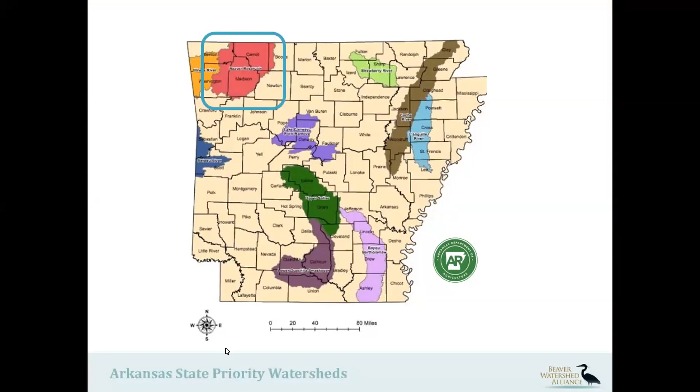The Beaver Lake watershed is a state priority watershed with tributaries that are listed on the 303D list that do not meet their designated use. There are currently 5 stream reaches that are listed as impaired, and part of that impairment is caused by sediment.

Sediment is the number 1 source of pollution in this watershed. Stream bank erosion is currently the highest contributor to sediment. Urban runoff and dirt roads also contribute. Low density development and loss of pasture land and forests is expected to have a greater contribution to sediment loads as we grow in this region, particularly in the western portions of the watershed.

That's why it's really important for us to focus on reducing rain runoff. Anytime we can slow down the rain, soak it in on site, decentralize it, or use nature and design to build and accommodate the stormwater, we can prevent or reduce these environmental impacts downstream.

A lot of communities are seeing the value of green infrastructure and LID as a way to solve water problems, especially ways to handle these more intense rainfalls we're having. We used to get 3 inches over a 24-hour period. Now we're getting 3 inches in an hour. So we're seeing extreme intensities of rainfall here in the Northwest Arkansas region that we've heard all over the United States are facing similar challenges.

So how do we deal with that water? Where is it going? How can we keep it on site? With all this, green infrastructure and low impact development can help do that.

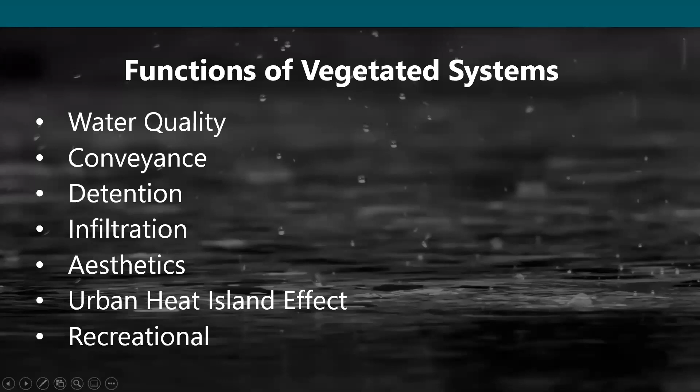And so whenever we work with either engineers or owners, and they're looking at implementing this type of feature, the first thing we want to talk about is maintenance. And when it comes to vegetated systems, plant selection is really crucial. Sometimes they'll want a lot of native plants, or they'll want a very extensive planting plan. And if the owner's not prepared for maintenance, then that can be a burden on them.

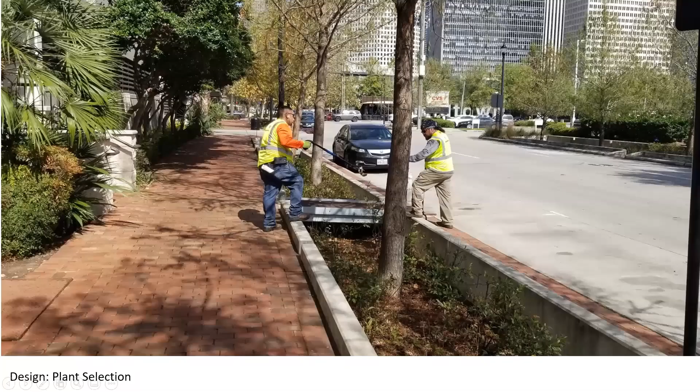So we have another question. Is a bioswale just a ditch, not an engineered infiltration trench with select media? So I think a bioswale can be with your engineered soil, or it can be without it, just depending on how you do your design. So I think it kind of goes both ways.

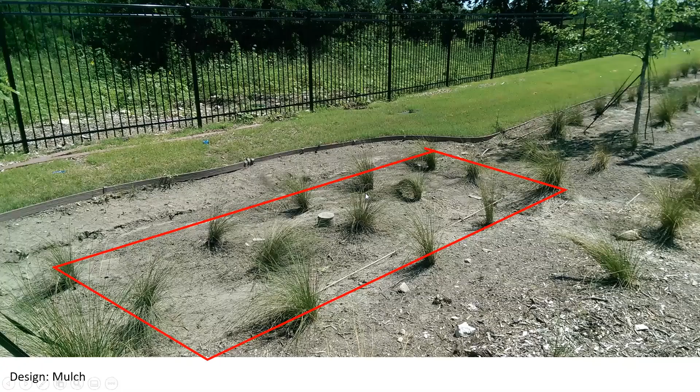Now when it comes to bioretention rain gardens, a lot of times you'll see a mulch layer on top. I like using mulch when you are going to infiltrate water into engineered soil, say if you want to drain water into a subsurface drain. It's always good to have a mulch layer sitting on top of your engineered soil, because it's almost like a sacrificial layer. Here's a project where the actual footprint of the engineered soil is roughly what you see on this red mark that I called out. They had some issues with erosion, which carried a bunch of sediment and clogged the mulch. But what's really good is it didn't actually clog the engineered soil. Mulch is very cheap and easy to maintain, so what you can do is dig up all the mulch that's clogged with sediment, expose the engineered soil, and put back a new fresh layer.

We'll figure out later on that erosion is probably the number one killer of vegetative systems, when your slopes start to rill out and just carry loads of sediment in there.

So what is engineered soil? I would say engineered soil is a type of soil blend that meets certain water quality and infiltration specifications. Typically it will have a specified infiltration rate, and it will also provide some type of water quality benefit, generally removing total suspended solids, oil and grease. It's also a loosely defined term. If you blend up sand and compost together, technically that's engineered soil. So it's a pretty broad term, but when I refer to engineered soil, I'm referring to something with a specific criteria for drainage and water quality.

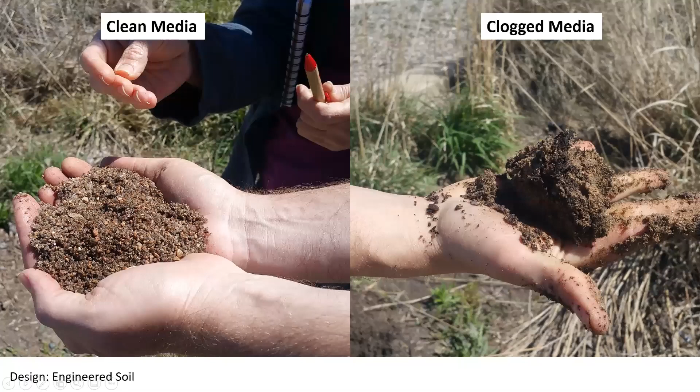This project, we'll talk about it more next week, but what's interesting about it is it actually went through Hurricane Harvey. So we put it through the ringer.

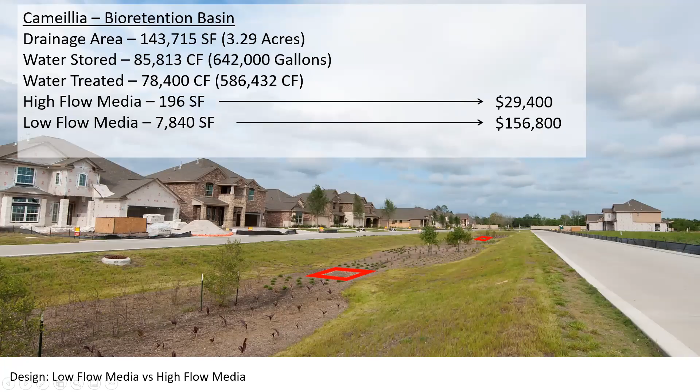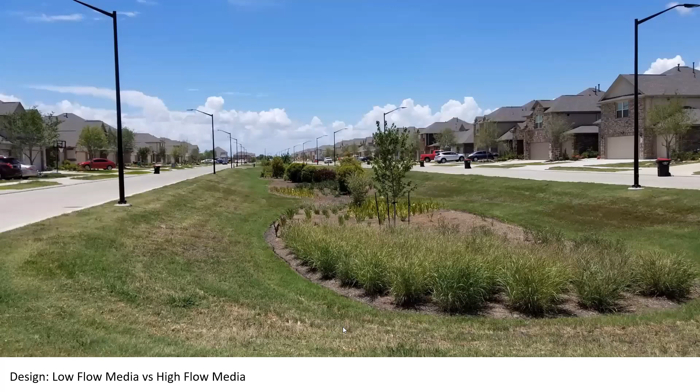All right, let's go. We've got some questions real quick.

Is your general expectation that the sacrificial layer will have to be periodically removed and replaced? Yes, I'll talk later on, but we usually remove and replace that mulch layer once a year, maybe twice a year.

What depth of ponding is allowed in this bioretention basin? Typically, you're going to see one foot of ponding. I know in certain municipalities, like Harris County and Houston, you can go up to 3 or 4 feet, but that's pretty much your limit, probably 3 feet.

What can local municipalities do when there are no compliance requirements or post-construction ordinance and the bioswale needs maintenance? Really, that's going to come down to the owner. If there's no one enforcing maintenance, the system will probably sediment in and work for a while, but depending on the design, it's only going to last so long without some type of maintenance.

Anytime you do these designs, it's good to put a maintenance contract built in so that after it's installed, the contractor has to maintain it for, say, the first 3 or 5 years, whatever it may be. But it's always good to also minimize your maintenance, so you can put in a design that's very low maintenance so the owner doesn't have to worry about it as much.

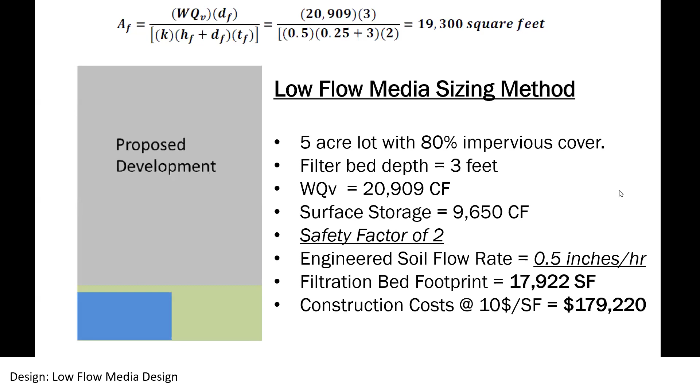So instead of using this model where we fill up our rain garden and then let it drain, what we like to do is use a more dynamic model. This is a TR55 model.

It's a very simple rainfall distribution model. It assumes that as your rain garden or bioretention basin experiences rain, the system is already infiltrating.

So that rain garden or bioretention basin can handle a certain amount of rain. At the point where the soils are flowing at their peak rate, that's when you actually get your surface storage, and the basin fills up with water.

If it's a really heavy event, you might get some bypass that goes into your overflow. But after the storm calms down, eventually that engineered soil will drain out the entire basin.

When you use this method, you get a more efficient design. Here's a good visual example of how that works.

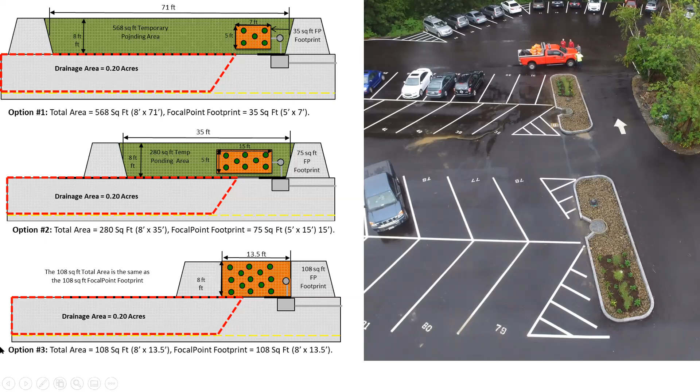If we take that same example and swap out a higher flow rate—in that first example it was half an inch an hour, but in this example we're upping it to 100 inches an hour—that dramatically reduces your footprint.

We went from 18,000 square feet down to 300 square feet. So we might still have a basin that's fairly large, but the component that actually does all the drainage needs to be much smaller, cutting down construction costs and maintenance.

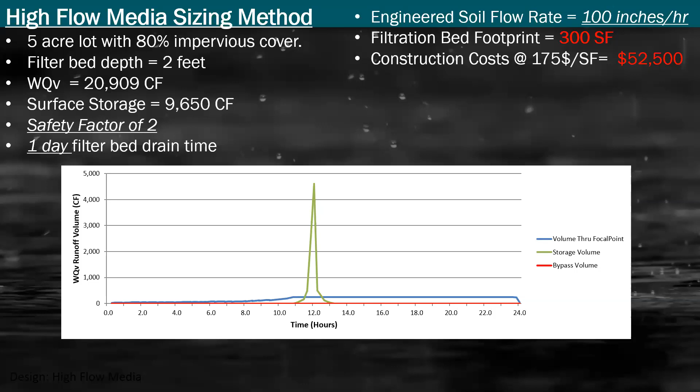You can also run these numbers through a TR55 spreadsheet just to ensure that all the water goes through your filtration bed and doesn't go into bypass mode.

Another good example of these types of systems is your subsurface drainage. A lot of times they'll use aggregate with a perforated pipe wrapped in filter fabric, but aggregate only has about 40% storage volume.

If you take a modular underdrain or some other type of arch chamber, you can actually increase that storage volume. Here's an example: instead of just using a perforated pipe, we use a tall modular underdrain.

Each of those boxes can contain 4 cubic feet, so we went from 40% void up to about 90% void.

There are about 10 or 12 of those boxes, so we have at least 40 to 50 cubic feet of storage just within the drainage structure, not including the voids of the backfill.

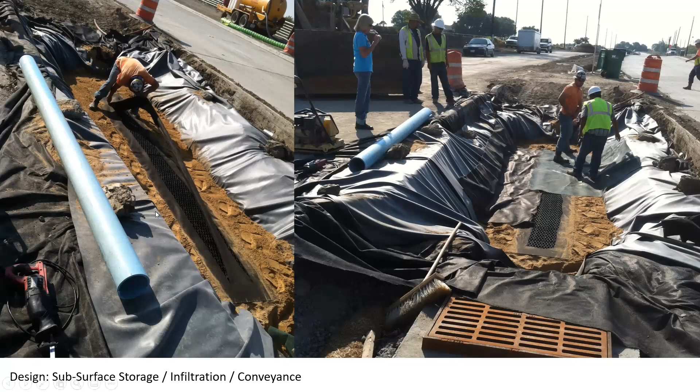Here's a better example of how you can expand that, say for a sloped bioretention basin—you can take that underdrain and expand it out, whether using modular boxes or arch chambers. Here's an example from a recent project we installed out in West Texas.

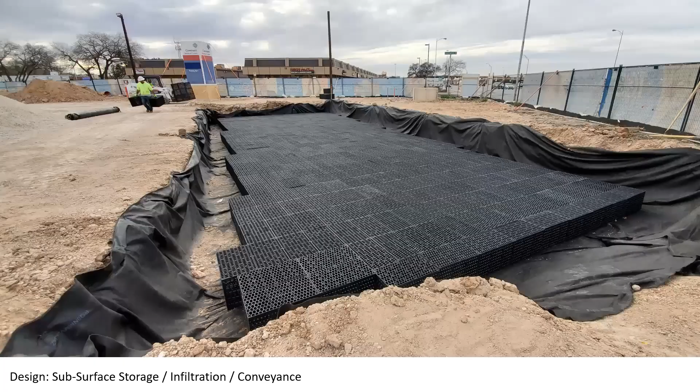So this system, I believe, is about 2,500 cubic feet. And then we ended up just installing a small 100 to 150 square foot bioretention system on top.

So you can see we built up these forms. We installed our bridging stone and our engineered soil. And they ended up backfilling the top of the tank and all the perimeter with rock.

So this is going to be a giant, basically an infiltration basin. And that's another advantage of using these systems, is that if you can't get surface storage, you can always store water below by expanding that under drain.

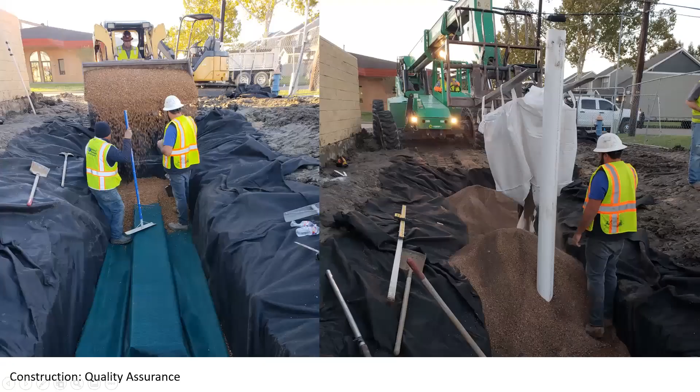And another thing that we like to do in these designs is use a lot of quality assurance. So when we install it, we like to put all of our engineered soil in super sacks.

We also, instead of wrapping our under drain in what we call a filter cloth or a non-woven, we use a microgrid. A microgrid essentially looks like a window screen. What it does is it keeps the aggregate from getting inside your under drain, but it also allows a higher flow rate, so you don't have to worry about clogging as much.

You can see when we dump that engineered soil in, typically we do about a cubic yard per sack. It's not too expensive to do this, because a lot of times we're only using maybe 10 or 15 bags, so we can fit all that on a truckload.

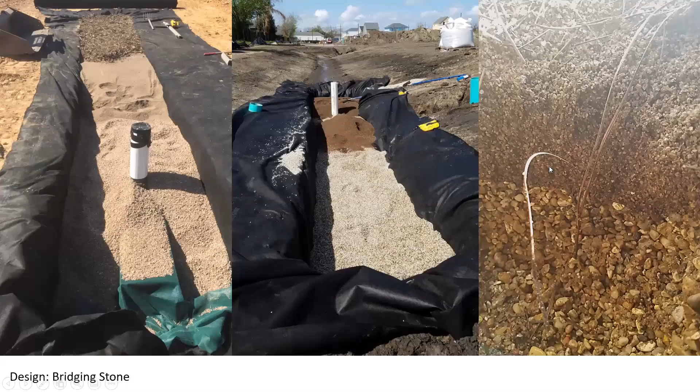If you don't know anything about bridging stone, I said that term before. Bridging stone, in our design, we use pea gravel, but all it really does is provide a layer. So basically what you do is install your under drain, backfill it with bridging stone, and then put your engineered soil on top.

So what happens is that engineered soil creates a bridge. Instead of having to separate the stone and the engineered soil with a filter cloth, you're just using a natural geotechnical process to do the work.

This is a pretty simple method you could do. You can have a geotech do that for you, and you can also follow it. There's a lot of local municipalities that end up using this.

And another thing we do is, after construction, we will wrap up the system. So after we install the engineered soil, you can see there's a lot of loose dirt, and we'll end up wrapping it up. A lot of times they'll end up getting a lot of sediment on top.

So when we come back to do the planting, we'll have to remove that filter cloth, put in our mulch, and end up doing the planting. And then you can always include this, we call it a SWPPP detail.

You can include this detail in your SWPPP plan so that the contractor ensures that they do it. If they have that detail in there, they'll more likely put it in their budget and install it correctly.

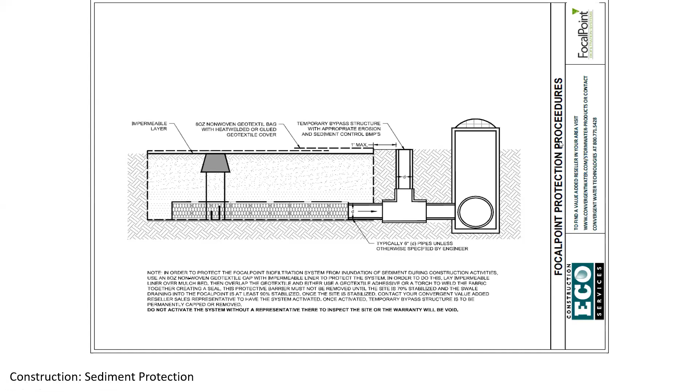And then you can always do an infiltration test. So one thing we do is when you specify engineered soil, if you have a flow rate of say 50 inches an hour, or 30, or whatever it may be, you can do a simple flow rate test. We have a little hydraulic conductivity tester we take out.

This just keeps the contractor honest, and it also makes sure that after you install it, it wasn't clogged from construction sediment or erosion. If the contractor can't pass it, then they have to go back and install it correctly or make repairs.

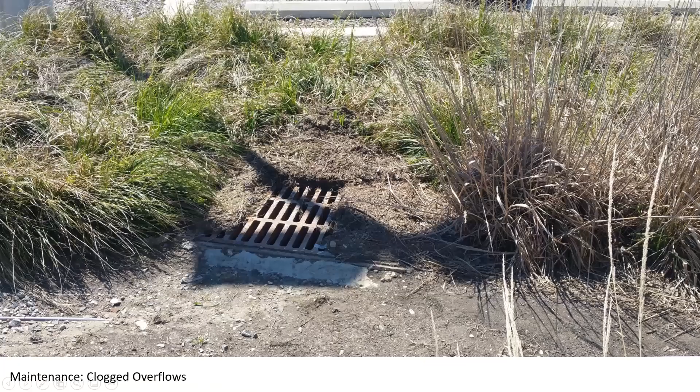Probably another common issue you see with these is the overflow structures will get clogged—you're going to have plant debris and matter in there. But what we like to do, you'll see later on, is use beehive overflows or an elevated overflow. Those flat grates will accumulate debris a lot quicker than, say, a beehive overflow.

And like I said earlier, erosion is the number one killer of these systems. Whenever you get these rills develop in the slopes, it washes all kinds of sediment into your system, and it can really reduce the performance. So that's something to watch out for.

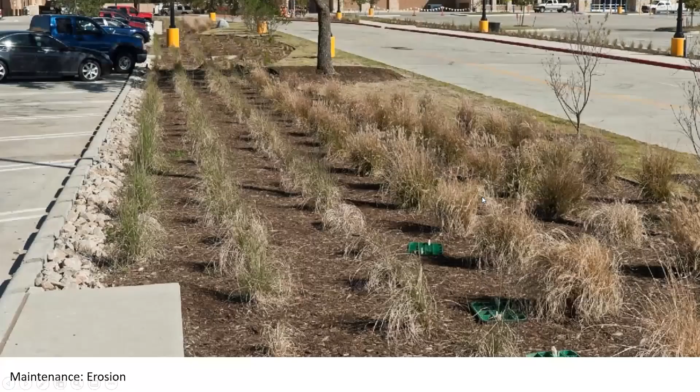You'll see this usually early on when they're trying to establish vegetation. And here's a good example—this is a project in North Texas where right after its installation, this looks perfect, right?

You can't get any better than this. You got your curb cuts on the left, you got some rock there to help dissipate the flow, and then the plants there to capture all the runoff.

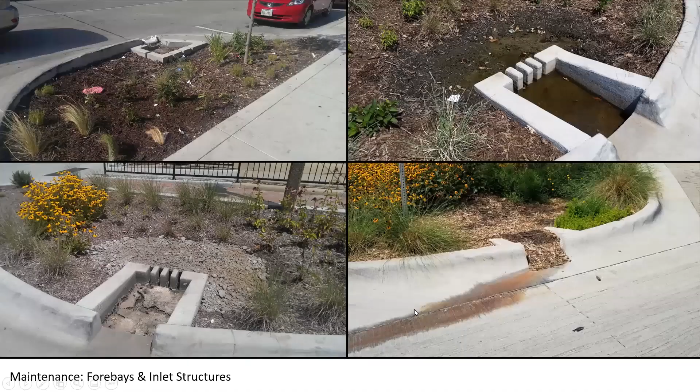You can also do forebays, structures like that. I'm not a big fan of just these concrete forebays, especially the open ones, because if you don't have a lot of free drainage, if your landscape isn't below where the water comes out of these inverts or structures, you'll end up getting ponding water and a lot of muck and debris.

You can also just do a rock forebay. But if you don't have some type of structure, especially in a parking lot that isn't going to get a lot of sediment, it's not that big of a deal. But an area like this, with a lot of people walking around and a lot of cars, you can see what happens when the sediment ends up dropping out of the water. Whenever it storms, it all fills up in the rock void. So this could be a challenge to maintain - you might have to literally dig out the rock and throw it away and get new rock in there.

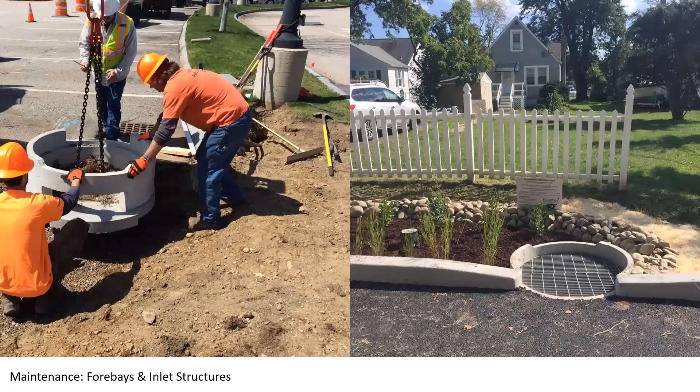All right, we'll move on. So here's another example - that last one was an enclosed structure. If your owner doesn't want to see trash and debris in the rain garden or in your structure, you can have it enclosed. This one is actually kind of an open top, so you'll see trash and debris accumulate, which could be good because it lets the maintenance guys know, hey, this needs to be maintained. But these types of structures are really nice.

This one in particular takes water off the surface, drops it down 10 inches, and then lets it drain into your rain garden or bioretention.

So this is another good way of keeping that water in there. All right, cool, we got enough time.

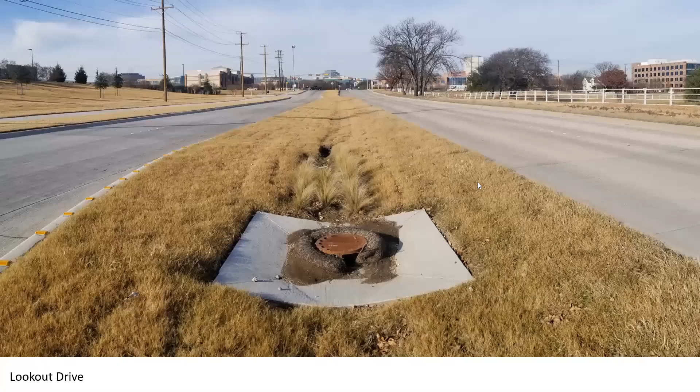We'll go through some of these case studies. A lot of these are from North Texas and Houston, where these multifunctional designs are pretty popular. But a lot of these principles can be applied in all parts of the United States. So here's a really good example of a simple center median swale.

If you look right next to the overflow structure, that's where our bioretention system is. Where you see the plant, I'm not sure if that's Gulf Muhly or Mexican feathergrass, but that's actually where our filtration bed is, our engineered soil, our under drain, and all those things. You can see they never actually took off the straw wattle from the overflow structure, so it's actually working out well, keeping some of the debris out of the overflow.

You can see the maintenance is pretty minimal, I'm sure the city has really just mowed it. There are a few pieces of paper that get in there, but this is also a pretty small drainage area, and this road isn't used very often. So this was a good pilot project for the city because they knew there wasn't going to be a lot of sediment and debris getting into the swale, a good way for them to apply this concept and test it out.

What they did was use a rock forebay, basically, where you have curb cuts with maybe a foot or two of large stone. But you can see even after a couple of years those things will fill up. The challenge is once they fill up with dirt and debris, you'll start getting vegetation growing in there. Generally it'll hold up pretty well, but if you want that fresh rock look, you're going to have to go out there and clean it out.

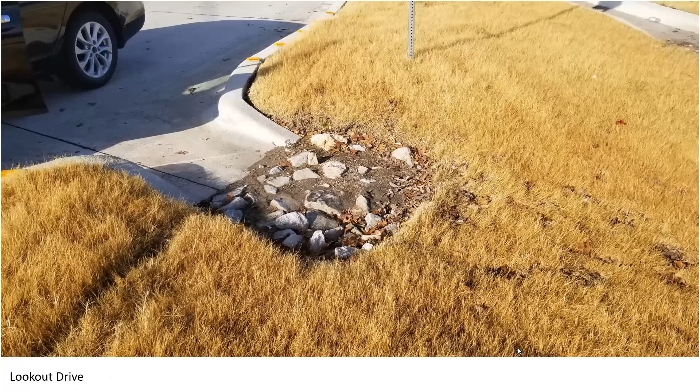You can see where a larger curb cut is, how much sediment starts to accumulate in these systems. One thing I probably would have improved on this design is the ditch line on the swale. I probably would have lined all of that with some type of aggregate, that way it carries the water quicker to the bioretention system. You can also see the grass is having a harder time surviving down in that ditch line.

Here we go, we got a good question: it looks like the grass might migrate into the bioretention and take over. Yes, that is a very good probability when you don't maintain those systems. But the good thing is those systems will still infiltrate even with grass on it, it'll reduce the infiltration rate but won't completely stop it from draining. And if you do want to remove it, you can always dig up that grass, put down some mulch, and then replant it.

We also have a question about cold winter environments. These systems work great in cold winter. In fact, if you want to email me, I can hook you up with a colleague of mine who does a lot of work in Maine. Some of these systems will be completely inundated with snow and plowed snow, and then during the summer they'll do a little bit of maintenance and get it working again. So if you want to email me or reach out to Becky and get my contact info, I can connect you with one of my colleagues who deals with that issue a lot.

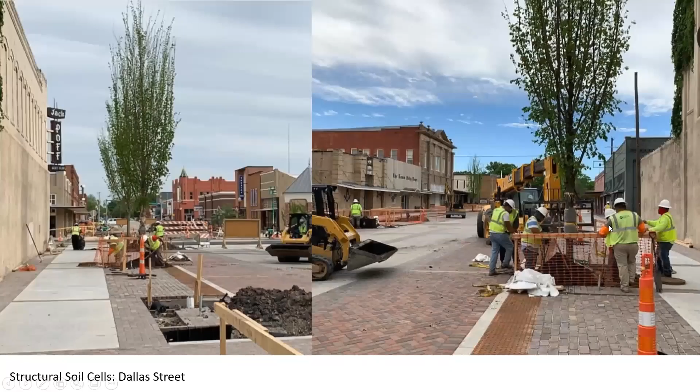Earlier I talked about the urban heat island effect. We all know trees do not do well in urban environments, mainly because sometimes the soil conditions aren't great, but a lot of it has to do with the pavement around the trees compacting the soil so much that it makes it difficult for tree roots to find the nutrients, air, and water they need. A lot of times, especially down where I live in New Orleans, you'll see the root systems just take over and buckle pavement and cause havoc on your utilities. So the answer to that is what we call structural soil cells.

So this is a project where you can see they planted all the trees, but those are actually permeable pavers on the sidewalk side. And underneath all those permeable pavers sits these StrataVault soil cells. There's about 3 or 4 different vendors I've seen with this product, but essentially the soil cells provide structural support for your pavement. You can drive on it, do whatever you need, but the soil that stays within those cells is uncompacted, and you can also put a better blend of soil than just what you dug up out of the ground.

And what's really good here, you see in this design, we got our permeable pavers on top, we got our bedding layer, we got our stone, we got our soil cells, and then below we have a drainage layer, and our perforated pipe.

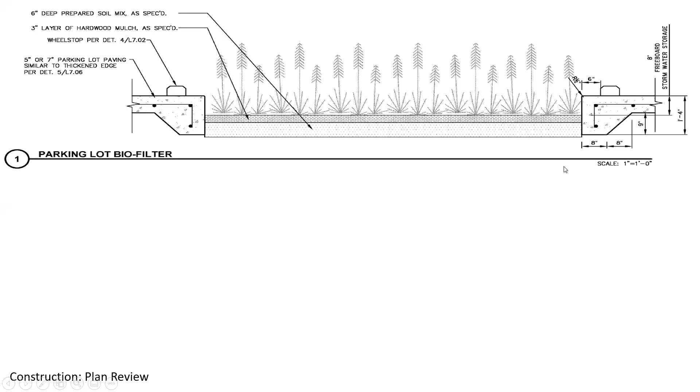So this is a really cool parking lot project we did in North Texas. What's interesting is in the original design, they called for a 6-inch drop off the pavement. But when the contractor installed the landscape, they actually had it go directly up against the pavement, so they had to come back in and cut it down.

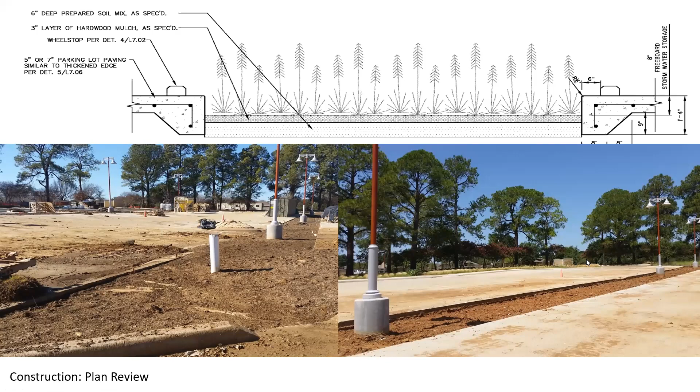But they got some really cool results out of this. If you go out and look at this project, it's really great. All you see are these large bioswales that end up draining into a bioretention system on the low side. What's really cool is you don't see any drainage inlets. All the water flows into this landscape, and the landscape takes care of a lot of the infiltration and drainage, with some small overflow structures for big rain events.

You can see early on it took a little bit to get the vegetation established. This is probably where you want to do more upkeep and more inspection. You can see we're getting some mulch starting to migrate. Even during the rain event, before all the plants grew up, it carried some water and sediment down to where our engineered soil filtration footprint is. This is during a rain event, so it's going to pond water, and there's also some sediment that's gotten into it, but overall it's performed really great.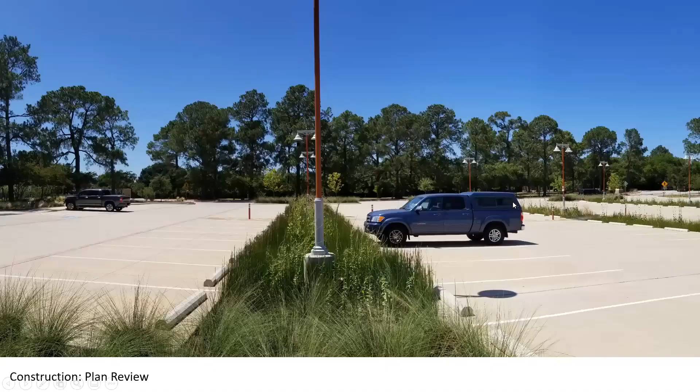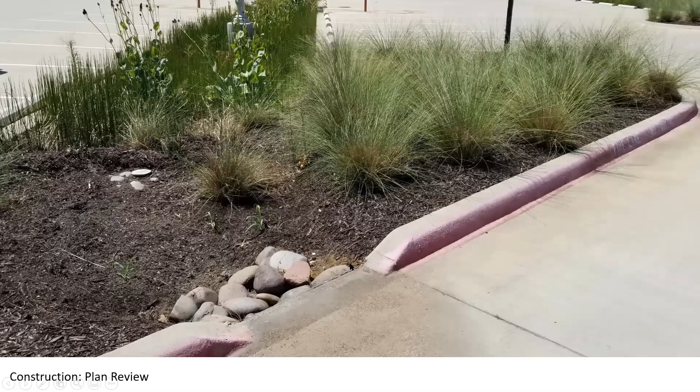In fact, the only real maintenance the Parks Department did is they just kept adding mulch. Earlier I mentioned it's always good to remove that clogged mulch and put back a fresh layer, but in this situation they just kept adding mulch. Right now they have a foot of mulch sitting on the engineered soil, but it still drains, so it still works. This was a good example of having some type of resilience in your design.

We'll skip this one and go to this next one. It'll be our last case study.

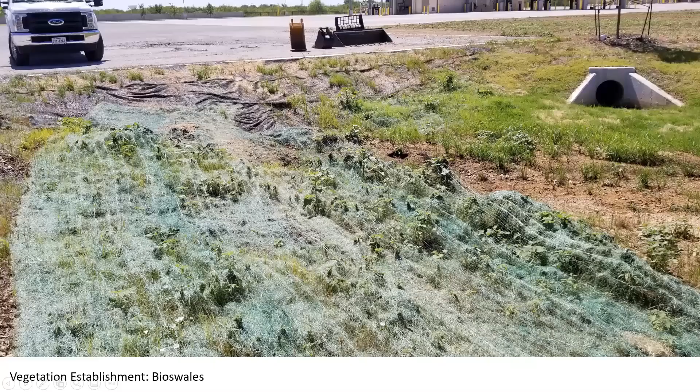If you know anything about Curlex, this is not how you apply it. They actually just draped it over the weeds. The way you're supposed to apply it is you smooth out and grade the ground, and then apply it directly on the surface.

They also wanted some type of vegetation in there because they couldn't get it to grow, so they ended up putting in sod. When they put sod around the gabion walls, they actually raised up the surface a little bit, so now the water ponds in between the bioretention areas. They had to come back in and put some fill soil in the middle so that the water could actually get into the gabions and into these filtration beds.

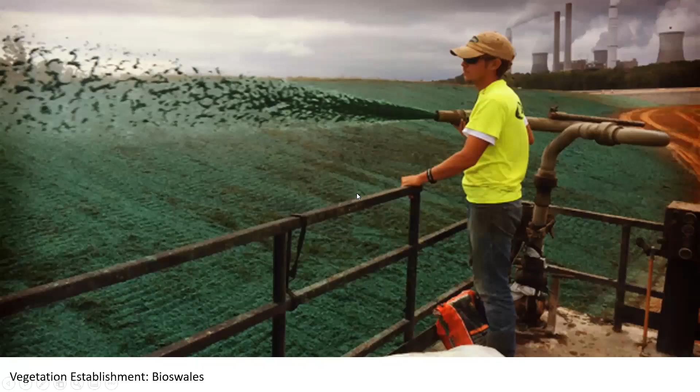When you need to establish a quick stand of vegetation, what's really great is using hydraulically applied erosion control blankets. This is a product called Flexterra, where you can put whatever seed blend you want in there, along with liquid and the other nutrients you need, and you literally just spray it out of the end of a hose. This establishes vegetation within a week or two versus months. Obviously Curlex and these other erosion methods are cheaper, but if you really want to make sure you don't have erosion problems, spending the extra money on this type of stuff works well.

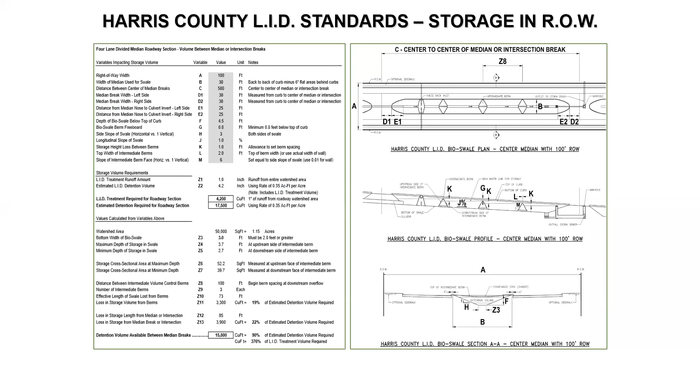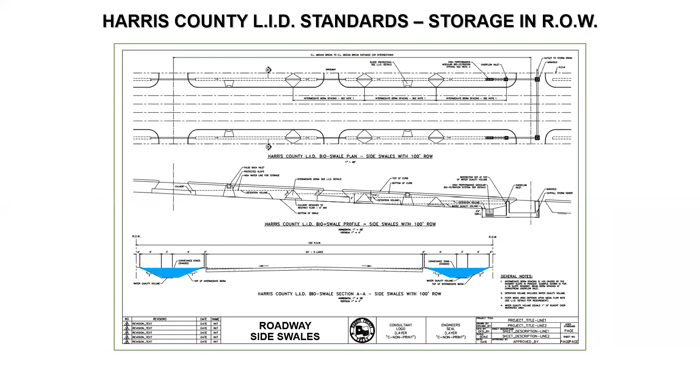In this example, you can see where they have these berms that help store water. This is another good resource, if you're really wanting to apply this design concept, that'll help you take advantage of this multifunctional design. You can see they have the side swales, the center median swales, pretty much any type of application you're going to do on a roadway project.

But like I said, this works for a normal parking lot on a retail area or things like that. All right, so we'll get down to the rest of the questions. So if you keep adding mulch, will that reduce the ponding requirements? Yes, obviously, if you start to raise the surface of your bottom area, it's going to affect the ponding volume. That's why we like to make sure they don't just keep adding mulch.

Do you have any suggestions for smaller cities in Northwest Arkansas trying to encourage LID that is more diverse than just a grass-lined swale? Obviously, what you can do is put a plant requirement in there. You can say, hey, we want these native plants, say 100 plants for every 1,000 square feet. So yeah, you can definitely put criteria in there encouraging more plants rather than just a grass-lined swale. That's definitely something you can do.

But again, you've got to make sure you have the teeth in your ordinance so that the developers and the engineers follow that.

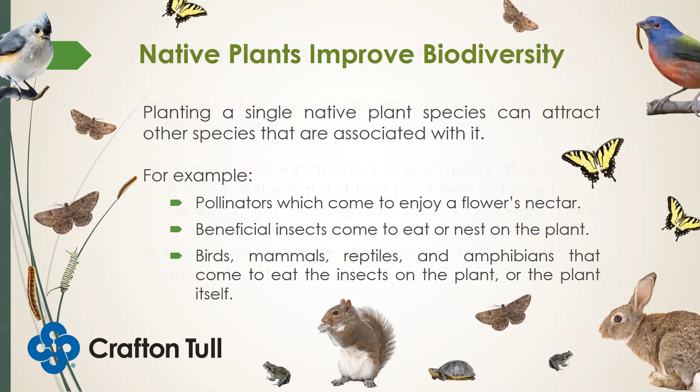With urbanization and development comes habitat fragmentation and loss of ecosystem services. Planting native plants is a way of reweaving the web of life back into the built environment, helping patch back in some of the habitat lost due to development and urbanization.

Using native plants for low impact development projects is also great for species conservation. As mentioned earlier, some species are completely dependent upon native plant species to complete their life cycles. Case in point: monarch butterflies.

Monarchs require native plants to sustain them along their migration routes across North America, especially native milkweeds. They need these to lay their eggs and provide nurseries for their growing young. Without native milkweeds along their flyways, they cannot complete their annual migration each year, and much of the decline in monarch numbers over recent years has been attributed to this loss of habitat.

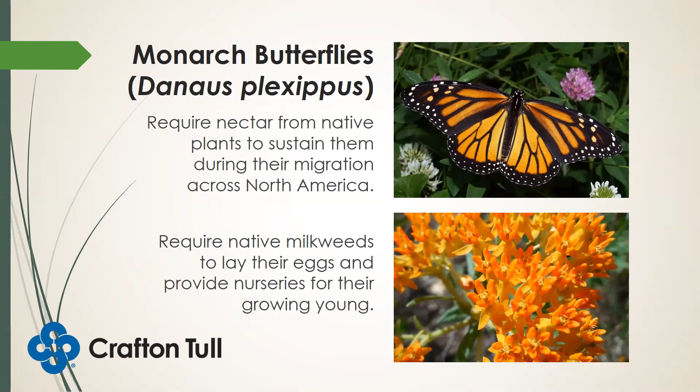What about some other benefits of native species? Many have very deep root systems that reach down into the soil profile to pull up water during dry summer months, making them more drought resistant than many non-native landscaping alternatives traditionally used over the last 100 years or so.

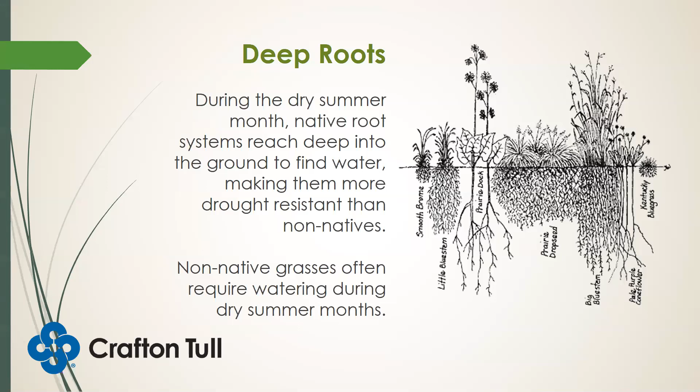These deep root systems also help hold the soil in place. They improve the soil's ability to absorb and filter stormwater, which helps reduce runoff and removes more pollutants before they enter our local waterways.

Also, since native plants are already adapted to our local climate, the need to irrigate and keep them watered throughout the year is significantly reduced. There may be a need during the first year after planting to help them get established, but once established they require very little maintenance and irrigation, surviving mostly on rainfall.

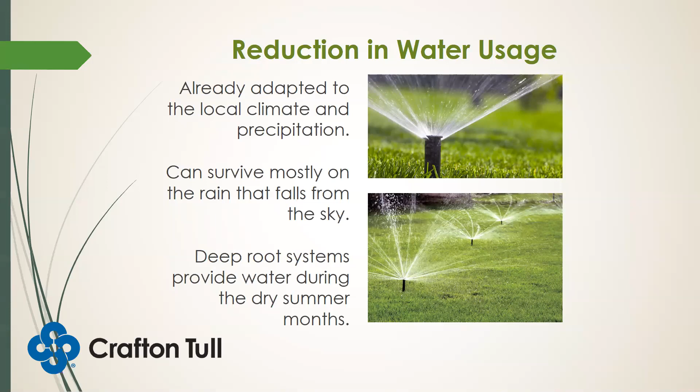They're also adapted to poor, low-quality soils with low nutrient levels. In fact, adding too many nutrients to a native plant garden can cause lodging, where plants grow too tall and fall over. So reducing fertilizer use is not just a cost-saving mechanism but also helps reduce the nutrients in runoff entering local waterways, reducing nutrient pollution.

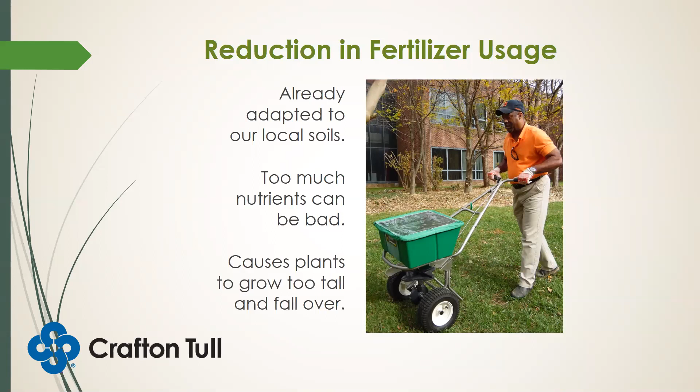Because native plants are already adapted to local ecosystems and the pests involved, we can reduce the amount of pesticides used. Many non-native species don't have the adaptations to local pests that native species have developed over millennia.

Since many invasive species started off as gardening plants, using native species instead can help reduce the number of invasive species that escape our gardens and get into the ecosystem.

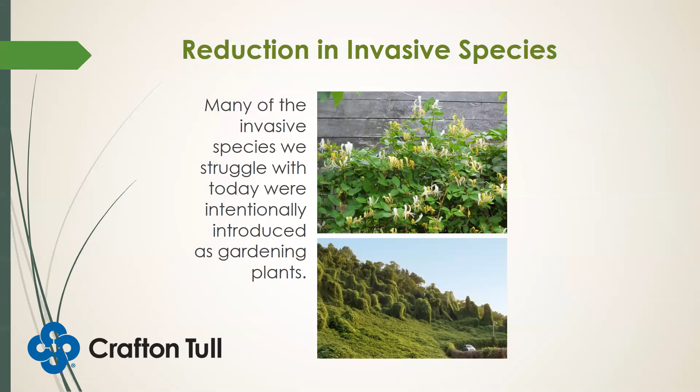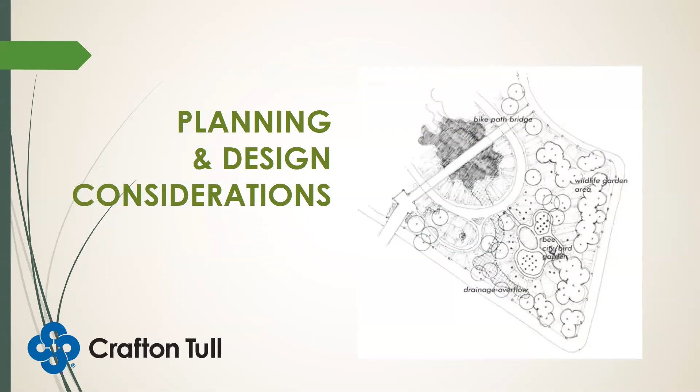So what about planning and design considerations? If you want to use native plants in your next project, what factors determine which species will work and which won't? For that, we look to nature, noting the environmental conditions of the location where we see the species growing naturally in the wild. Where do these species like to grow?

What is the soil moisture where we see them growing? Is it very wet or very dry? What about soil pH and sunlight duration—is it full sun, part shade, or full shade?

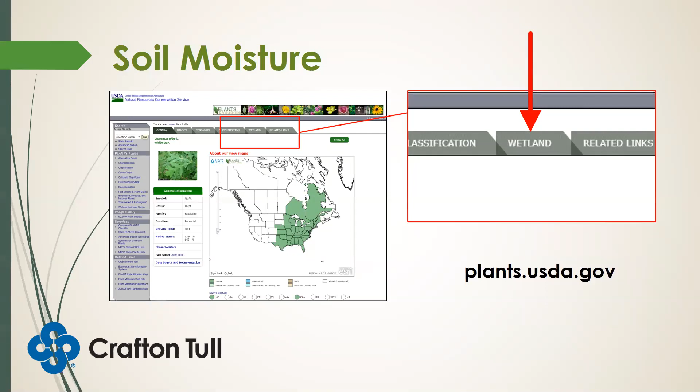Another place to get this information is plants.usda.gov. If you type in a species—here's an example of white oak, Quercus alba—it will pull up a profile for that species. If you click on the wetland tab, it will bring you to a list of the wetland indicator status for that species in each of the regions the Corps has divided North America into.

Here in Arkansas, this part of the state, the Ozarks, is in the Eastern Mountains and Piedmont region. Southern and Eastern Arkansas are in the Atlantic and Gulf Coastal Plain. If you're listening from a different part of the country, you'll need to look up which region your area is located within.

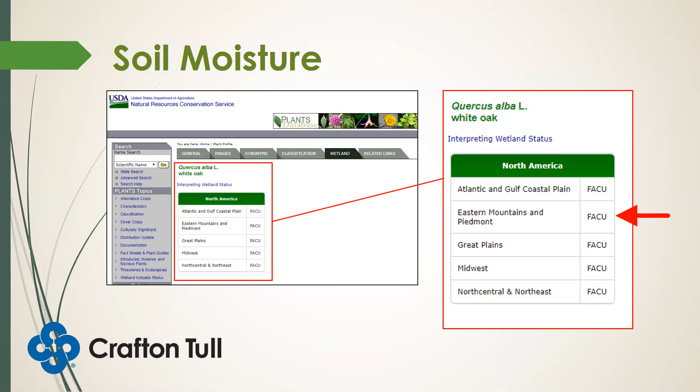So what are the different wetland indicator statuses? UPL stands for upland. These are plants that prefer well-drained soil. They can't handle inundation or much moisture. They're typically found high on the landscape in areas where ponding typically will not occur.

On the other end of the spectrum are OBL, or obligate wetland plants. These are the ones that really like having wet roots—your buttonbush, your cattails, a lot of the plants we typically associate with swamps and wetland type areas. In the middle there is facultative, FAC.

These plants like moderately dry to moderately wet conditions. And then in between each of those, you have facultative wet and facultative upland, which are kind of the halfway points between facultative and the upland and obligate statuses.

So if you think of this as a gradation from plants that like dry conditions to plants that like wet conditions at the bottom, this can generally help you figure out where on the landscape to place each species. Obligate and facultative wetland species are better for low areas on the landscape, poorly drained areas that stay saturated or wet for much of the growing season.

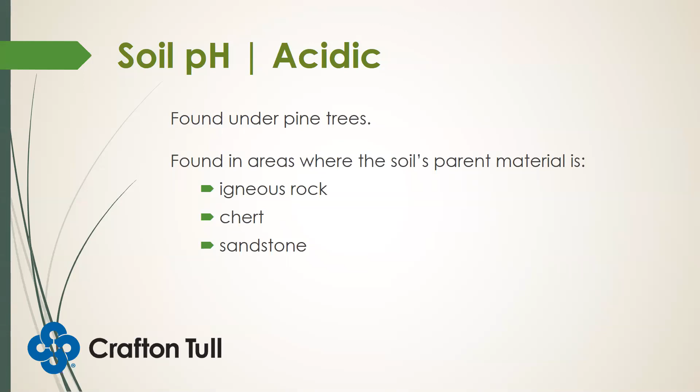You can also find low pH soils in areas where the soil's parent material came from either igneous rock, chert, or sandstone. These tend to impart a slightly lower pH to the soil than where the parent material is made of dolomite or limestone, which has a lot more alkaline or calcareous properties to it.

These types of soils are going to be found in mid to late successional forest. Beeches and maples are much better base cyclers than pines, and oaks are also better base cyclers than pines, but not as good as beeches and maples. So in a lot of these later successional forests, you'll see a rise in pH as the forest goes through the different successional stages.

So what about sunlight duration? Well, some native plants like full sun. A lot of these plants are found in the natural habitats of prairies and glades and areas that don't have a whole lot of things obstructing the sun.

You can plant these in wide open areas, or if you're here in the Ozarks or perhaps in the Appalachians, somewhere with south-facing slopes to get a lot of sun, that might be a good place for them as well—like the south side of a house or building.

Partial sun plants are found in their natural habitat in open forests, savannas, and forest edges. You'll probably also see plants adapted to prairies and glades that can handle some partial shade, and some forest plants that can handle a little bit of sun. This category is more ambiguous, but full shade native plants are generally found in the forest where they're adapted to that canopy and need that shade to complete their life cycle. They can't handle direct sun and will usually burn up.

For each of these sites we included a seed mix. We wanted species that attracted pollinators, and also species great for degrading petroleum that might be contained in runoff from the parking areas. Some wildflowers we included: purple coneflower, wild bergamot, black-eyed Susan, partridge pea, plains coreopsis, and common sunflower. For grasses: side oats grama, bottlebrush grass, little bluestem, and switchgrass. Three of these are warm season grasses, and the bottlebrush grass is a cool season grass—I wanted a variety there.

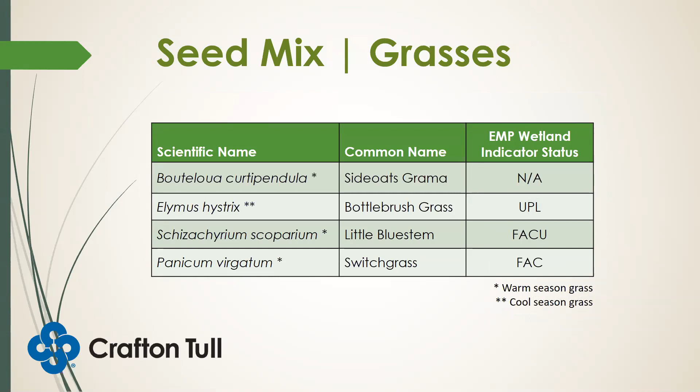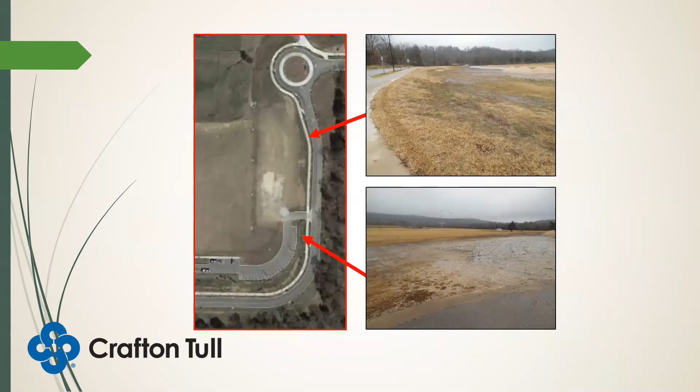Here's the rain garden area. We had two different types of site conditions to consider when making plant selections. The first is the edge of the rain garden, which has more well-drained soil and gets full sun, since it's towards the center of the regional park with not much obstructing the view or sunlight. The second region is towards the middle or low spot of the rain garden, where the soil is expected to be much more moist, though we still expect this area to get full sun.

So what species did we select? Well, we'll start off with what's higher up on the berm. Black gum - we thought this would provide some wildlife benefits. There are a lot of different bird species that like to use black gum as a food source or to build nests in. And you can see it is a facultative species.

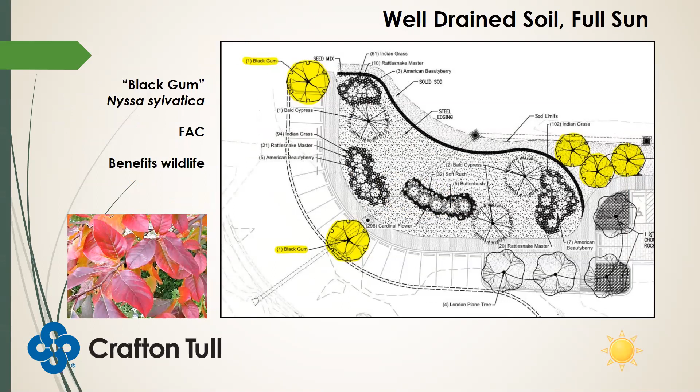American beautyberry, a facultative upland species in the Eastern Mountains and Piedmont region. This is also a great plant to attract pollinators and is also a host plant for several different butterfly species in our area.

Rattlesnake master, facultative species, another great one for attracting pollinators. A good friend of mine once said that she thought rattlesnake master sounded like a great name for a heavy metal band, and I agree with that.

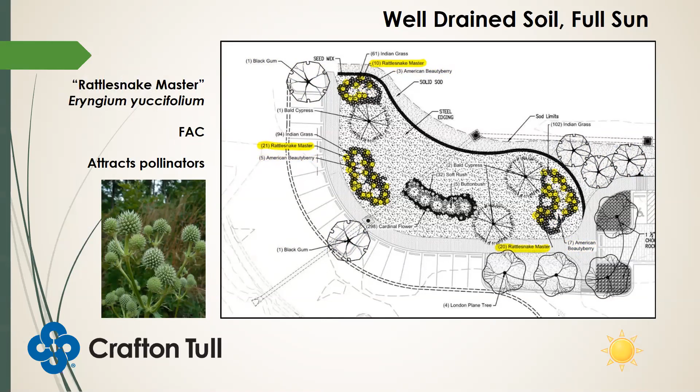So that's one reason why we included these, in addition to the fact that some of these big 4 grasses, such as Indian grass and little blue stem, are also host plants for various pollinators and provide food sources in the wintertime for bird populations.

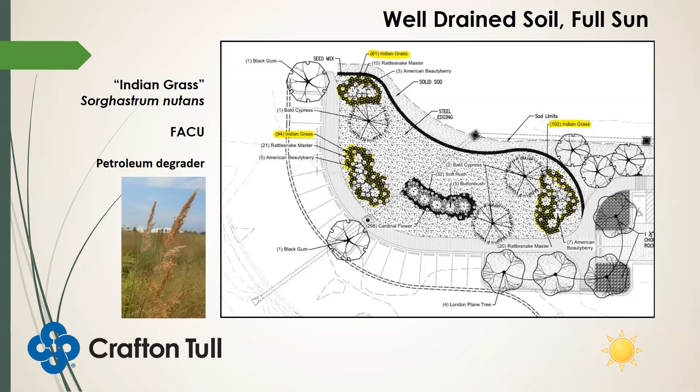Bald cypress, here's an obligate wetland plant, very beneficial to wildlife. If you've ever been to any of the swamps around here, you've probably seen plenty of bald cypress.

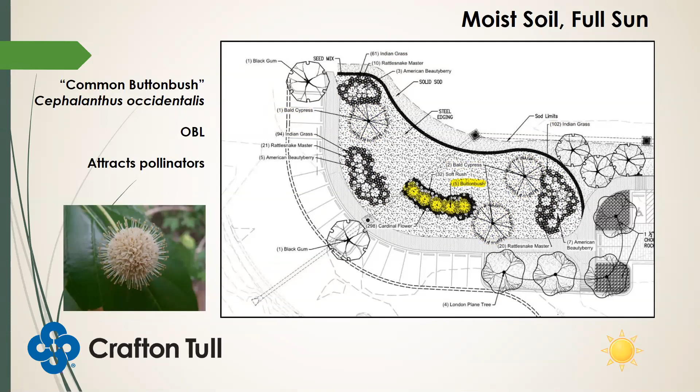Common buttonbush, another obligate wetland plant, and another great plant for attracting pollinators. Has a very pretty white flower - almost looks like a coronavirus if you kind of look at it, but it is a very beautiful flower. Also, these will turn into some bright red fruits later in the summer.

Soft rush, Juncus effusus, facultative wetland species, another great one for degrading petroleum just because of its root system.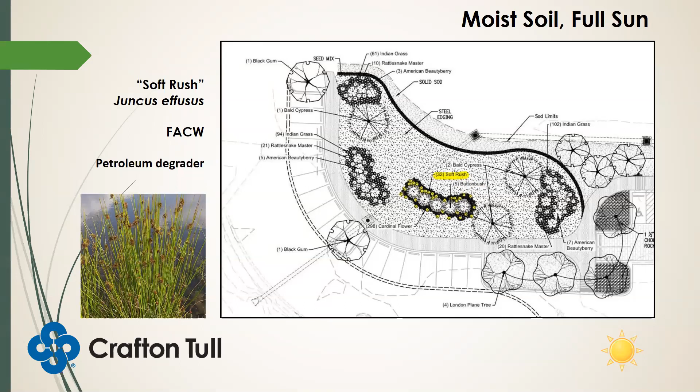Cardinal Flower, facultative wetland species, attracts pollinators, especially hummingbirds. Hummingbirds love the shape of the flowers because they can stick their long beaks down in there. I've seen a lot of hummingbirds on cardinal flowers around our house.

And here is the area containing a rain garden and a drainage swale. So we have two different areas with different site conditions we're looking at for this location. First, the rain garden - it's going to be in partial sun. There are some trees around that we expect to be blocking the sunlight for part of the day there. It's also going to have more moist soil there. Then the drainage swale - it's going to be sloped. We consider that to be pretty well drained. And we expect that area to be in full shade.

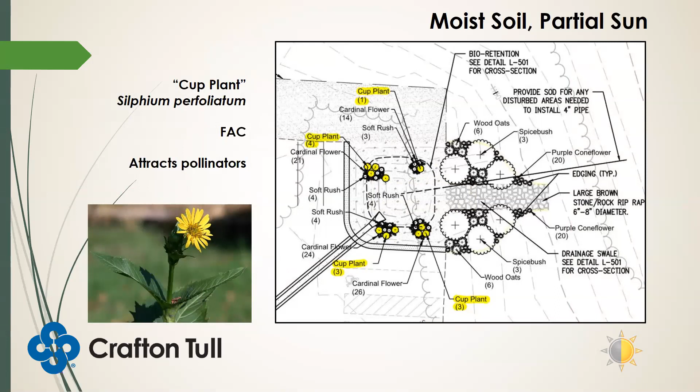So for the rain garden, we chose to specify cup plant, a facultative species. You see it growing a lot on riparian areas around here. It's also another great one for attracting pollinators. Again, soft rush, another great one for degrading petroleum as a facultative wetland species, so it can handle that moist area. And again, cardinal flower, facultative wetland species.

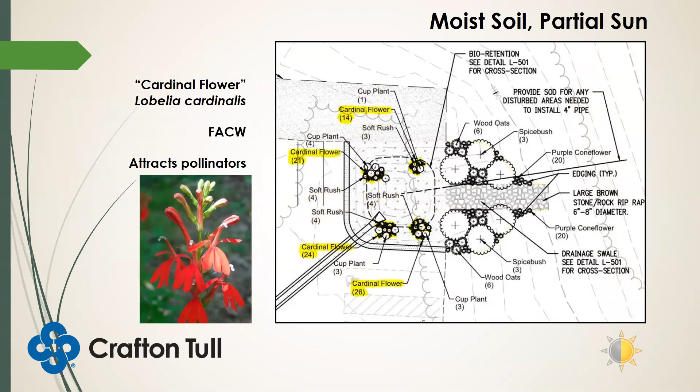Northern spice bush, this is going to go along the drainage swale. It's a facultative species - you see it growing a lot along riparian areas of streams, north slopes where it stays reasonably moist, doesn't dry out too bad. And it is the host plant for the spice bush swallowtail butterfly, among other species as well. Traditionally it was used as an allspice substitute. If you taste or smell the leaves, they don't taste great just to eat by themselves, but it could be used as a seasoning or to make a tea.

I enjoy it. Wood oats, Chasmanthium latifolium, facultative upland species. I really like these because they provide great winter aesthetics - you see these little seed heads on them, those will usually hang around for a lot of the winter. So when everything else is dead and gone, this sticks around, and I think the aesthetic value with these is really important because public buy-in is really going to be crucial. We're wanting to make sure that the public sees these, likes them, thinks they're pretty, and is inspired to implement similar projects, either in their homes, businesses, or cities.

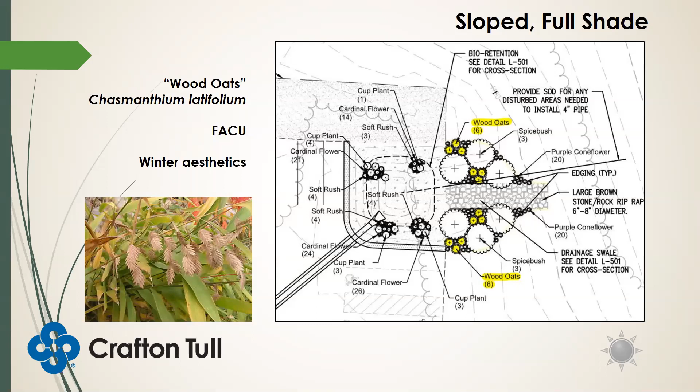Purple coneflower, Echinacea purpurea, another great one for pollinators, is a butterfly magnet.

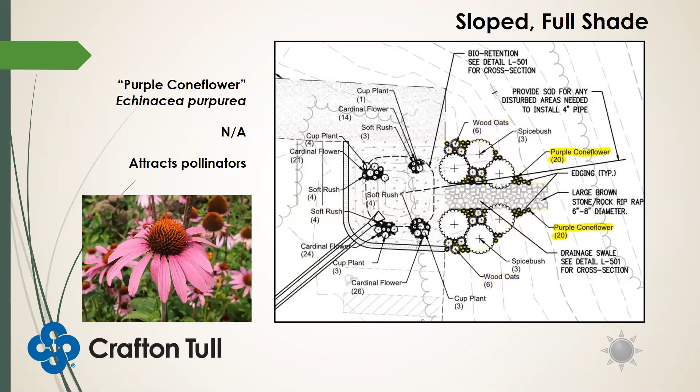Our final parking lot I'm going to go over is at Mitchison Park in Huntsville, which is located in Madison County.

Just beyond that, you'll see a slope, shown in the top photograph. Here's the design with a box focusing around the drainage swale that we designed. For this, we just had one site condition: a sloped or well-drained area located in full sun.

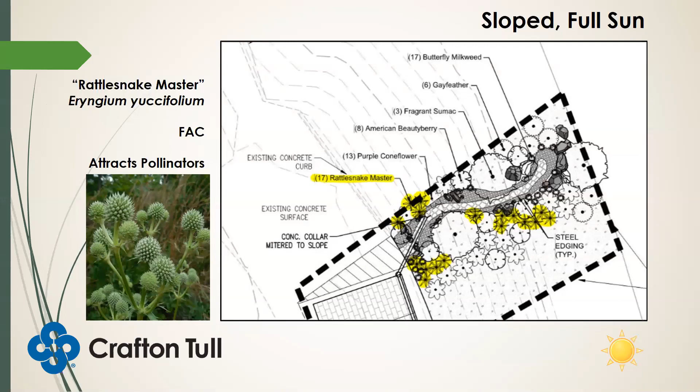So again, we chose rattlesnake master, a facultative species that attracts pollinators. Purple coneflower, which does not have a wetland indicator status, and generally when they don't, you just assume it's an upland plant. But these are also, like I mentioned, great for butterflies.

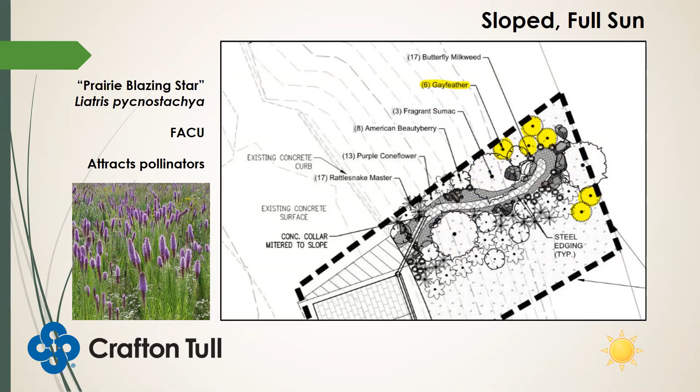American beautyberry, mentioned it earlier, another great one for pollinators. Fragrant sumac, another great pollinator plant, produces these really pretty fuzzy red clusters of berries. Gay feather, also known as prairie blazing star, a very beautiful purple flower. And butterfly milkweed, attracts pollinators and is essential for monarch butterflies and many other butterfly species.

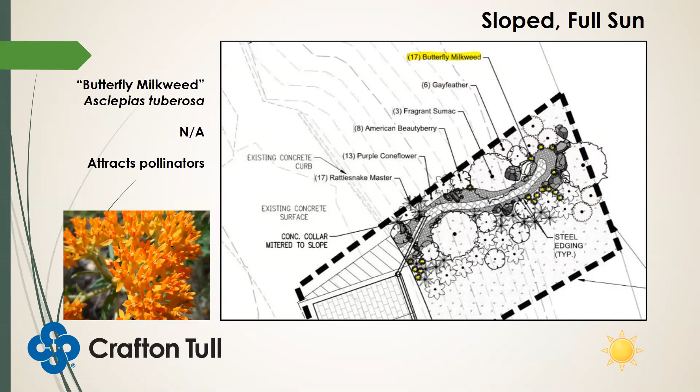Okay, with that, going to take a few questions here. Let's see if I can see. Do we have any? Is wood oats the same as inland sea oats?

Yes, Chasmanthium latifolium, those are the same species. I just always feel a little weird being in northern Arkansas calling them inland sea oats, and I always see them in the woods, so I've been usually calling them wood oats.

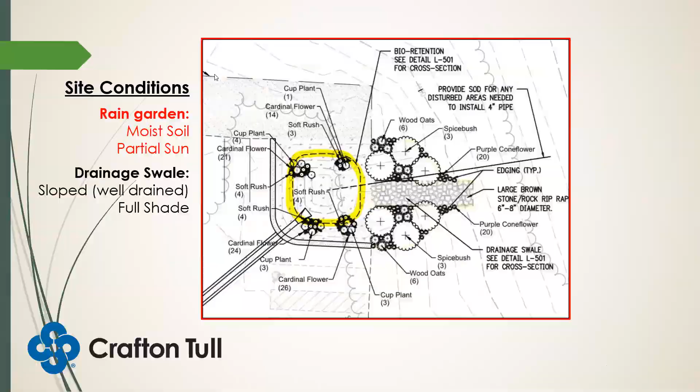How much maintenance will the Kessler project need? That's probably a good question for our engineers and landscape architects. Let me go back and see if I can find it. It's pretty far back there. I mean, our hope is that it's going to be low maintenance.

That's one reason why we were putting the seed mix in there too, is to help compete with any non-native or invasive vegetation that might try to get in there. And we'll also have some compost down, like Anthony had suggested.

Do you do any pre-treatment of your seed mixes? That's going to be up to where we get our seed mix from. Most places don't, at least the places I've talked to.

A lot of it is the method you use. I really recommend seeding in late fall, early winter, and then covering it with just a very light layer of straw. Down here, this far south, we have enough warmer days in the wintertime when those seeds will go ahead and germinate, and it gives them a head start. So by the time spring comes and the growing season is in full swing, these plants seem to do much better. Up north, that might not be an issue where it's going to stay frozen all winter long.

But yeah, depending on the species, some will need some form of stratification. Some species require cold stratification that mimics the process the seed goes through when it's laying on the ground throughout the wintertime. Sometimes if you just plant in the late fall or winter, that can help that process occur. The issue is you've got to keep the birds from eating them. It helps with a little bit of cover. I'm sure there's also plenty of engineered materials that can help protect the seeds until they germinate as well, and Anthony might be able to answer more questions regarding that.

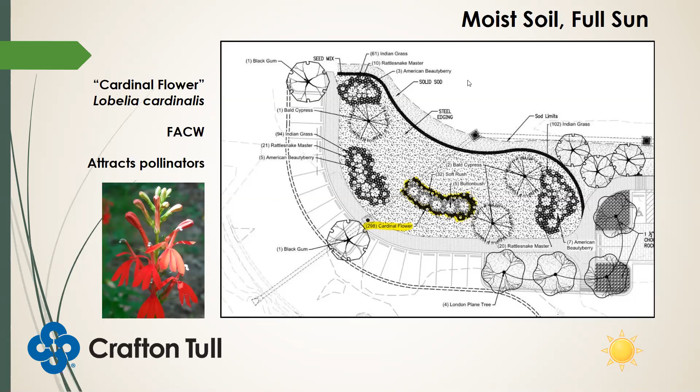If you go to plants.usda.gov, you can type in a species and it'll give you the wetland indicator status for that species for each of the regions. However, if you want to go to wetland-plants.usace.army.mil, you can download the list by region, and it'll include wetland indicator status for every plant they think is in that region. I'll put a caveat that sometimes you'll find species that aren't on the list that might be in another region, and that's fine if it's close enough.

What are some good sources of native plants if you don't have a local nursery? Somebody answered that — yeah, there's Prairie Nursery. I would really look in your region too, you can usually do a Google search. I think if it's within a 50-mile radius, that's okay. A 100-mile radius isn't ideal, but sometimes you just have to go with what's available.